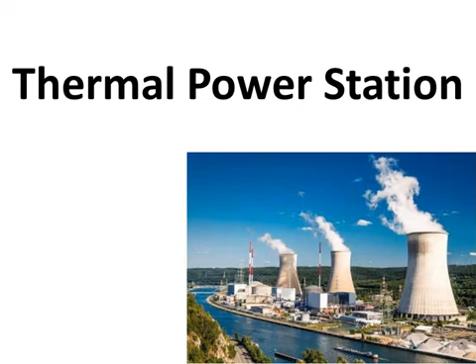Good morning to all. Today we will learn how electrical energy is generated from thermal power stations.

So in a thermal power station, the coal is burnt, by which heat energy is produced. This heat energy is converted into electrical energy. Coal is burnt in a boiler which converts water into steam. So by burning the coal, the water is heated to produce steam.

So in India, generally, bituminous and peat varieties of coal are used as a fuel in boilers. These are of medium quality, not so superior or not so low grade coal. So coal is used in the powdered form to increase the efficiency of the plant. The expansion of steam in turbine produces mechanical energy which drives the alternator.

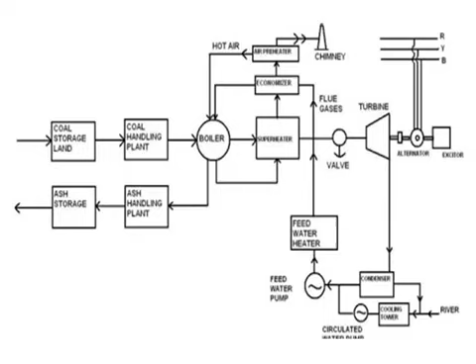And from the river, fresh water is then added to this condensed water to give it as an input to the boiler through the economizer. So this is the summarized working of the thermal power plant.

Firstly, the pulverized coal, meaning coal which is converted to fine particles, or you can say powdered coal, is burned in the furnace of the steam boiler. Then high pressure steam is produced in the boiler. This steam is then passed to the superheater, where it is further heated to increase the temperature and pressure of the steam. Then the superheated steam is given to the turbine.

This turbine rotates, and here in the turbine, the stored potential energy is converted into mechanical energy. The potential energy of the high pressurized steam gets converted to mechanical energy. After rotating the turbine blades, the steam loses its high pressure, passes out of the turbine and enters into the condenser, as we have seen in the diagram.

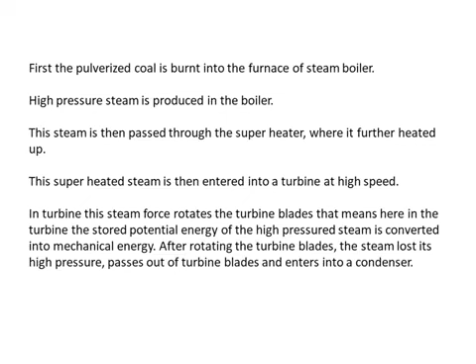In the condenser, the cold water is circulated with the help of a pump, which condenses the low pressure wet steam. This condensed water is then further supplied to the low pressure water heater, where the low pressure steam increases the temperature of its feed water.

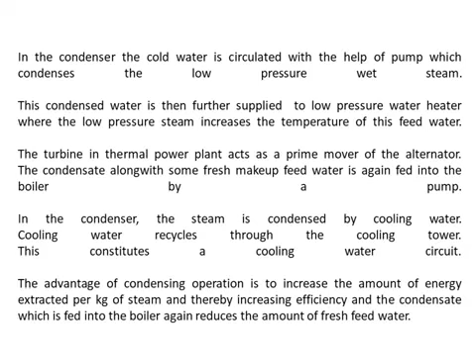The turbine in thermal power plant acts as a prime mover of the alternator or generator. The condensate along with some fresh water make up feed water, which is again fed to the boiler with the help of a pump. In the condenser, the steam is condensed by cooling water, as we have seen. Now, the advantage of condensing operation is to increase the amount of energy extracted per kg of steam and thereby increasing efficiency.

Now, these are main parts. First is boiler, which is used to produce steam from coal and water. Then superheater, which is connected between boiler and the turbine. It is to superheat the steam to increase the efficiency. Economizer, it is connected between boiler and the feed pump. It is used to heat the water before giving it to the boiler. It is again to increase the efficiency of the plant. Superheater and economizer both heat the steam and the water by using flue gases.

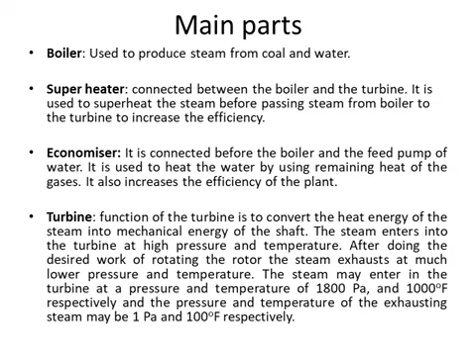Then the turbine, its function is to convert heat energy of the steam into mechanical energy, which is then given to the alternator. So after doing the desired work of rotating, the steam exhausts at much lower pressure and temperature. The steam may enter in the turbine at the pressure and temperature of 1800 Pascal and 1000 degree Fahrenheit, but the temperature and pressure of the exhausted steam is 100 degree Fahrenheit and 1 Pascal respectively. So the exhausted steam is at much lower pressure and temperature.

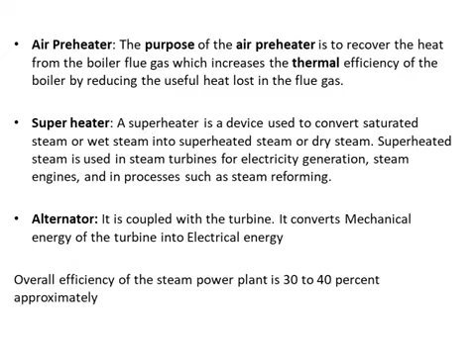Air preheater, as we have seen, its purpose is to increase the thermal efficiency of the boiler by preheating the air, means by heating the air before giving it to the boiler. Superheater, as we have already discussed. Then alternator, it is coupled with the turbine to convert mechanical energy into electrical energy. So the overall efficiency of the steam plant is very low. It is about 30 to 40% approximately. They are low efficiency plants.

Site selection. Thermal power plants must be constructed at such places where the cost of the land is quite reasonable. Plant is preferably located beside big source of natural water, because we need water as a source to produce the steam. Availability of huge amount of fuel at reasonable cost, it must be available there. Plant should be established on plain lands. The soil should be such that it should provide firm foundation for plants and building. Location should not be near to the dense locality, because they produce lot of pollution. There must be ample scope of development of future demand. Tall chimneys should not obstruct the traffic of airships. These are some points to consider while selecting the site for thermal power plants.

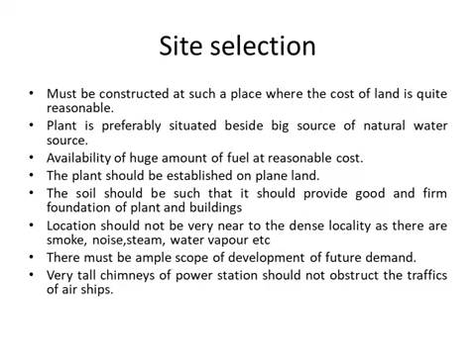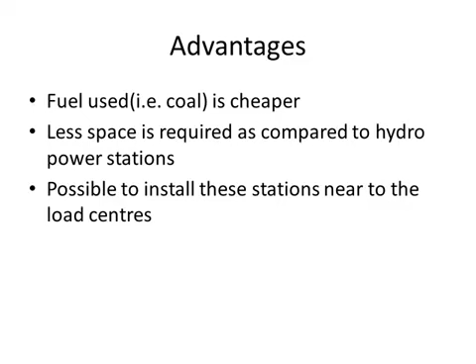These are advantages of thermal power plant. Fuel which is used here, that is coal, is cheaper. Less space is required as compared to hydropower plants, because in case of hydropower plants, large dams are required. So these plants are possible to install near load centres. This is not the case with hydropower plants. They are at faraway places from the load centers, because mainly they are constructed in mountainous regions due to the construction of the dam.